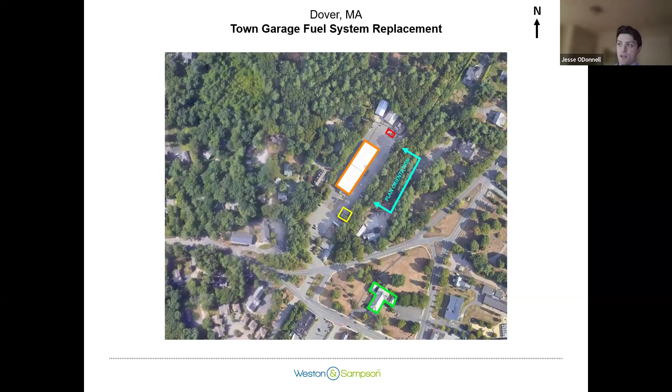So to provide some context of the timeline up to tonight, this has been a long 2+ year project in the making. We've had several milestones along the way, interacting with stakeholders and other boards and community members in town. It started off in June 2023 when Weston and Sampson issued our site feasibility report to the DPW, which evaluated potential upgrades to the salt shed, stormwater systems on the site, as well as the fuel system replacement.

The following August in 2024, we filed our first application with the planning board for this proposed fuel system project. The following September was our first planning board meeting for the project. During that meeting, we received some good feedback from the planning board. Notably, we received feedback to shift the fuel system a bit further away from the cell tower enclosure in the rear portion of the site, which we did implement to the planning board's satisfaction.

The planning board during that meeting also requested that we gather some feedback from the Conservation Commission. The project did not require that because it wasn't in the jurisdiction of the Conservation Commission, but we did seek to get on their agenda to gather their input, which we did. We presented this in front of the Conservation Commission on October 23rd of last year and received good feedback from the commission as well. That feedback mostly pertained to erosion controls and spill prevention measures, and we incorporated that feedback into the design, which we'll mention during our presentation tonight.

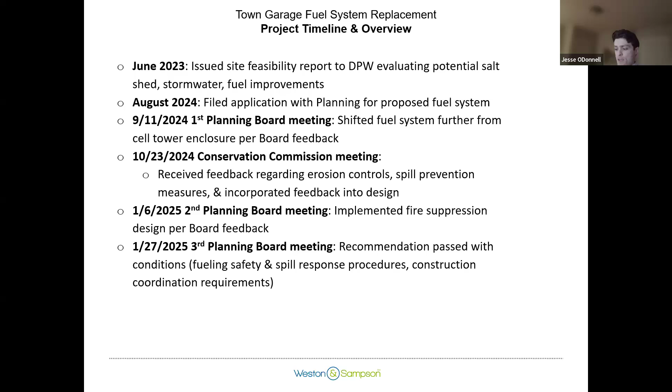There were a number of conditions, primarily pertaining to fueling safety and spill response procedures, as well as some construction coordination requirements. So that brings us to tonight, presenting in front of the Board of Selectmen.

I'd like to discuss more information on the existing fuel system. You'll see a photograph of the existing fuel system at the top with the Dunkin' Donuts building in the background, and a plan view just below showing the vantage point at which we're looking at this photograph.

The existing location of the fuel tanks presents one logistical challenge: the tank location requires vehicles to reverse either in or out when performing a fueling. This is a cramped and busy area of the site where several DPW vehicles are typically parked just off to the left of the photograph. So this is an unideal condition that we were certainly looking to improve upon with our design.

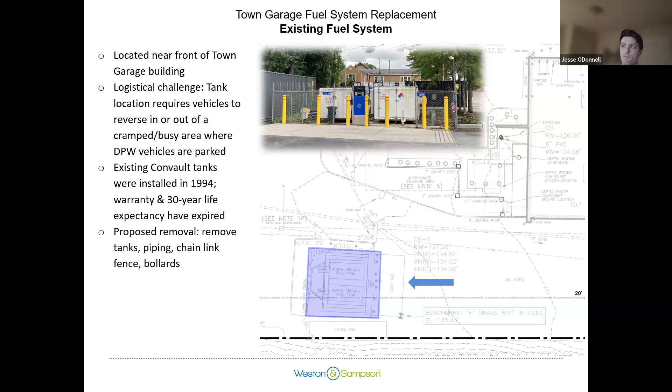The existing Convault tanks, as Kevin mentioned, were installed back in '94, so the warranty and the 30-year life expectancy for those tanks has expired. For public safety, we are looking to replace the tanks as soon as reasonably possible. The proposed removal would also include removal of the associated piping, the chain link fence surrounding them, and the bollards shown in yellow in the photograph.

Here's another aerial image of the site, provided for spatial context. The existing fuel tanks are in yellow, and the proposed tank behind the building is shown in red. You can see the blue dimension lines, and we're showing that the dimension of the fuel tanks to the closest dwelling is pretty equidistant.

We were looking at about 178 feet for both the proposed and the existing fuel tanks to the closest dwelling. The proposed fuel tank in red is about 105 feet away from the DPW garage building, while the existing tanks are a bit closer at 85 feet.

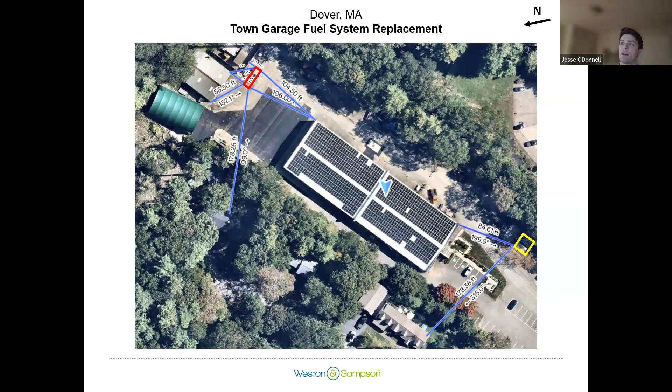As Madam Chair mentioned, there was a siting assessment that Weston and Sampson worked on in coordination with Kevin and the DPW in town. We assessed a number of different options on the site to place the fuel system. We always look to potentially replace the fuel system right in place, but usually this is not a great option, and that proved to be the case for this site.

When doing so, I'd like to mention again those reverse maneuvers that are unideal for vehicles. But also, replacing the fuel system right in place would cause an interruption to on-site fueling operations. For several months during construction, we would need to find a temporary fueling solution for town vehicles, and that can be very expensive and cost prohibitive.

The existing tanks are also partially located within an AT&T easement and the Dover structure setback. So by proposing the tanks to be located elsewhere on site, we would be able to restore some conformity to those items.

We also assessed the area just south of where the existing fuel tanks are currently located, a bit closer to the Dunkin' Donuts building. Doing so would require more funding to accommodate additional geotechnical and environmental drilling efforts to assess soil suitability in that area.

Where we ultimately proposed the tanks in the rear portion of the site, we had already gotten feedback and information on the soil conditions back there, just because of its proximity to the salt shed project and the stormwater improvements we've already done.

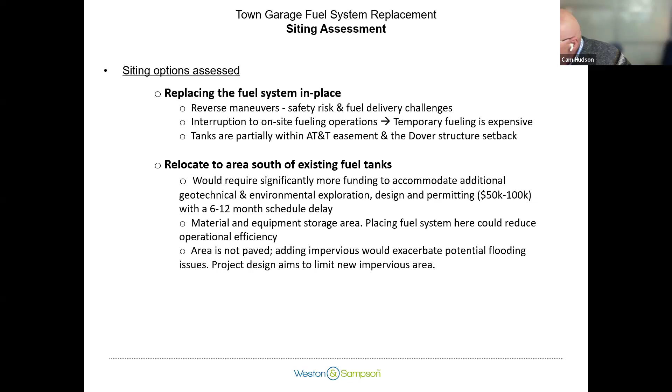The design of the project does aim to limit new impervious area, in accordance with stormwater best practices. So with all that in mind, we looked at the option that we ended up selecting, which is relocating the tanks to the rear portion of the site.

As I mentioned, we did meet with Conservation Commission and the Planning Board to receive their feedback and either have, or will implement, their recommendations to their satisfaction.

We find this is the best option for vehicular circulation and access. It's in an open area in the rear portion of the site that's less congested than the current location of the tanks. The rear location keeps this critical infrastructure away from a public-facing location and away from the parking lot, which can get pretty well utilized during the day in the front.

It complies with zoning and dimensional requirements. The grades in the rear portion of the site are a bit more forgiving, which makes the design easier to manage. Those geotechnical and environmental investigations have already been completed in the rear portion of the site and show that the soil back there can accommodate a facility based on the information those investigations yielded.

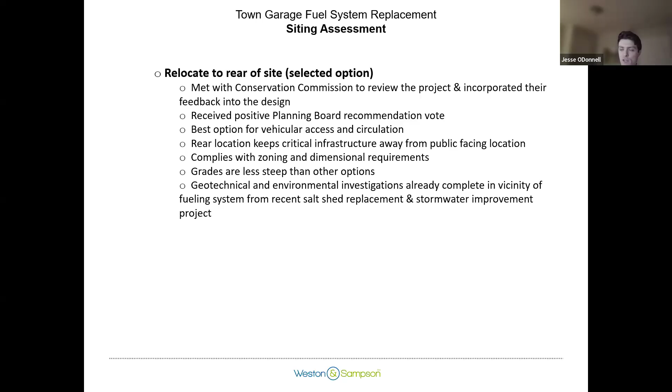So with all that in mind, I'd like to segue to the proposed system in the rear portion of the site. You can see in orange on this plan the location of the proposed 9,990 plus or minus gallon double-walled steel split tank. This is an above-ground tank that contains both gasoline and diesel fuel.

It does have a single-sided fueling configuration. In other words, the vehicles will be pulling up on the left side of the orange rectangle, as you see it on this slide, for fueling.

In red, we're showing the proposed canopy associated with the fuel island. The canopy will have recessed motion sensing lighting. Just beneath the canopy is the concrete fueling pad, which will also have bollards surrounding the pad just to protect the tanks from vehicles.

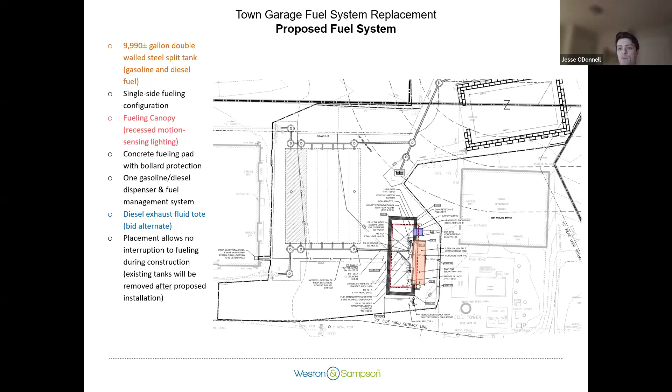In blue is a diesel exhaust fluid tote. This is a feature that we view as a bid alternate to the project. I'd like to reiterate that the placement of the fuel system here allows no interruption to fueling during construction, because the existing tanks would be removed after the proposed installation.

So with that all in mind, I'd like to transition to my colleague Tyler, who will have a few moments to talk about safety features for the proposed infrastructure.

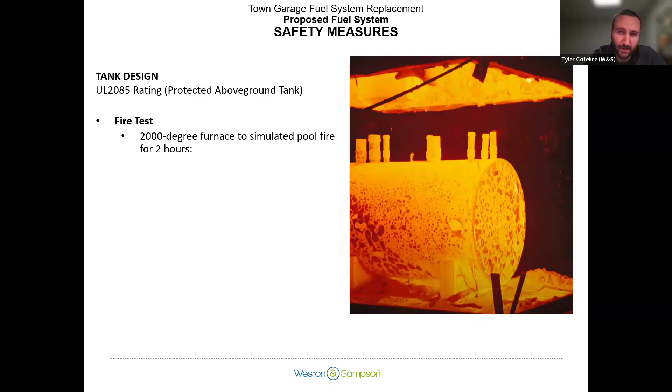Thanks, Jesse. As Jesse mentioned, I wanted to take a couple minutes to talk about safety, which Weston and Sampson does take very seriously, and we know it's been a big concern on this project. There's actually a lot of engineering behind this system that isn't obvious when you just look at a tank on a site plan. So we just want to walk through some of the safety features so everyone is clear as to what we're proposing.

The main piece of the system is a UL 2085 fire guard tank. It's one of the safest tanks you can buy. It's essentially a tank inside of another tank with concrete between the two, and that concrete is super important. It helps protect the inner tank from heat, helps absorb impact, and makes the tank way stronger.

In order for these tanks to achieve a UL 2085 rating, they must go through a pretty intense testing regimen. The first is a 2000-degree furnace test. Essentially this is to simulate someone pouring gasoline all over the island and then lighting it on fire and letting it burn all around the tank. Even under those conditions, the tank is not allowed to burst, explode, or rupture, and the inner tank must stay protected through the whole test.

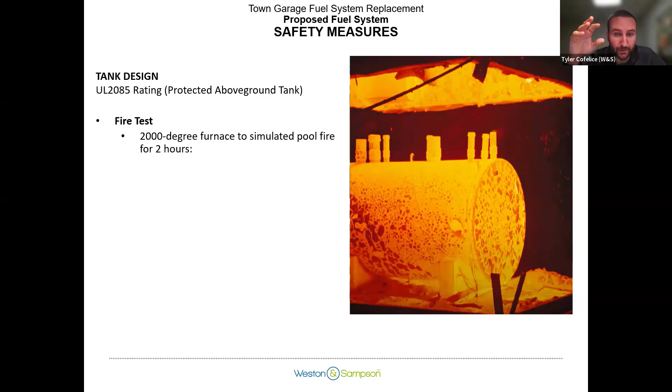I just wanted to highlight that even though the tank can handle a pool fire, as mentioned by Jesse, we are adding fire suppression to help prevent such a scenario from happening in the first place.

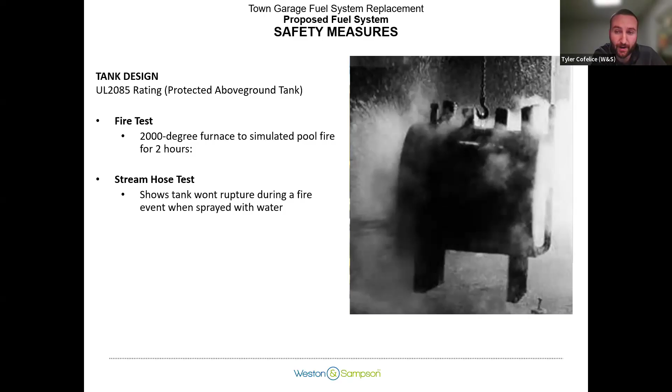Following that is a stream hose test. This simulates making sure the tank doesn't rupture when firefighters are cooling it down after a big fire. So following the fire test, it's hit with a bunch of cold water, and then the tank has to show that it won't crack or rupture, ensuring the fuel inside is safe.

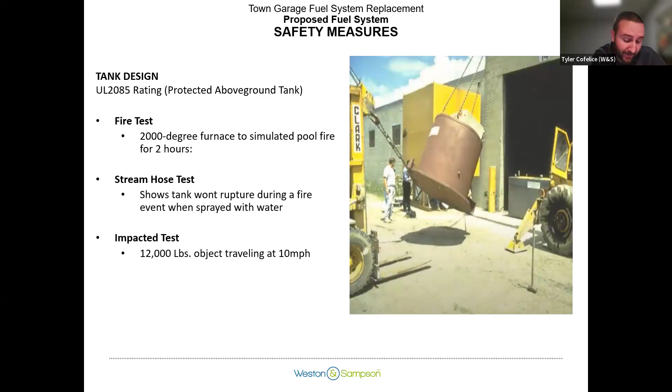In addition to that, it has to also pass an impact test. It's tested with a 12,000-pound object traveling at 10 miles per hour. It's essentially testing it with a vehicle strike, saying that even if a vehicle were to run into this tank, the inner tank has to remain intact and protect the fuel. Again, kind of like a belts and suspenders approach, we are adding bollards so that vehicles don't even have an opportunity to run into it, even though the tank is strong enough to withstand it.

And then lastly, it also has to pass the ballistic test. They shoot this tank 5 times with a 308 rifle at about 100 feet away, and the bullets cannot penetrate the inner tank.

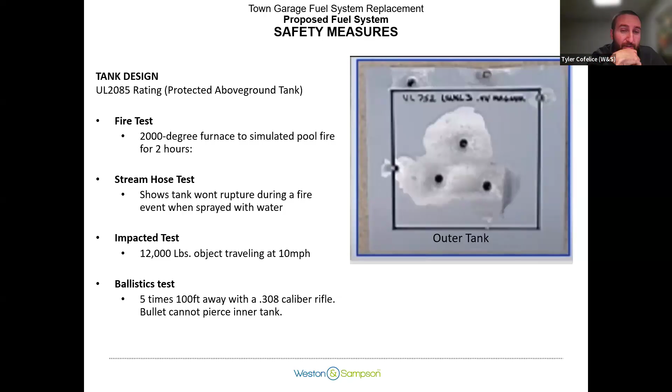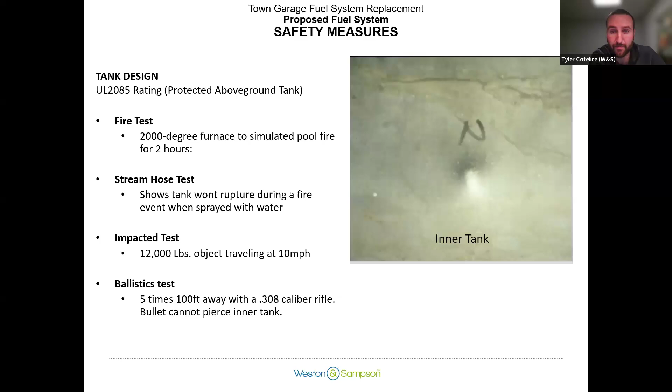So this is a photo showing the outer tank, and then the next picture shows what the inner tank looks like. It's just a small dent. Again, these tanks are not your standard tanks you'd normally think of - this is one of the big safety features of this fuel island.

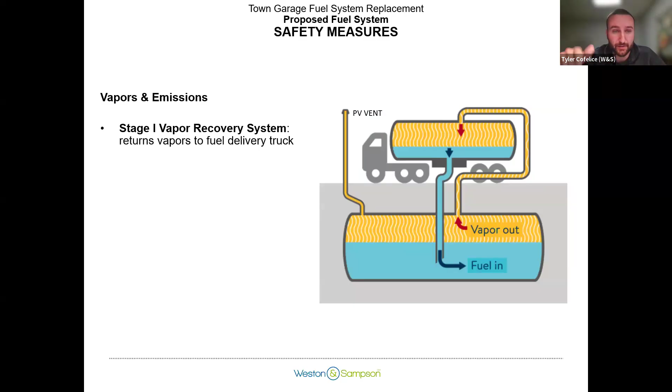In addition to the tank, we also have a bunch of vapor features to help manage vapors on the site. There are actually also regulatory requirements as well. We have a stage 1 vapor recovery system that ensures when tanks are filled, the displaced vapors inside the tank aren't just pushed out to the environment. They're actually pushed back into the delivery truck, as shown in this image.

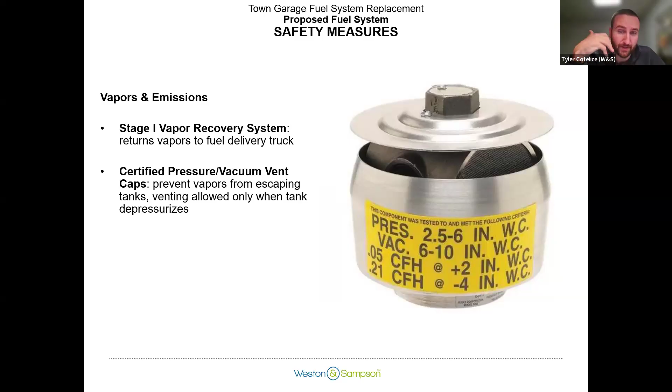We also provide a pressure vacuum vent cap that helps contain the vapors inside the tank, and it only opens to relieve pressure if there's ever a pressure buildup. Modern vehicles are also equipped with vapor recovery to help capture the vapors as you're filling up, which all helps keep the vapors from this fuel island very low. It's similar to what the existing fuel island currently has.

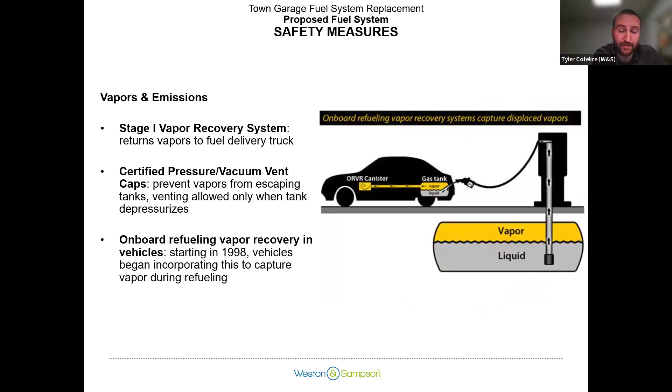There's also tank monitoring and the fuel management system will talk to each other, so that if the levels don't match what has been used, it'll flag that there's a leak not being accounted for. The fuel hoses also have shear valves, so if someone drives away with the fuel hose in the vehicle, it will shear and cut off both ends so no fuel is lost. We have anti-siphon valves, so if there's a leak in the pipe, it doesn't drain the whole tank onto the ground.

We've also talked with the DPW about adding a standard operating procedure of using a catch basin mat that will be placed over the nearest catch basin during tank fuel deliveries, so that if there's an incident, the pad will prevent fuel from going into the drainage system. So it's a lot of belts and suspenders that go into this design to help ensure safety for the neighborhood, the environment, and the DPW itself.

So, Tyler, can I ask you a question about some of these systems? Do they all require electricity, and what happens if the power goes out? No, they don't - a lot of these are passive.

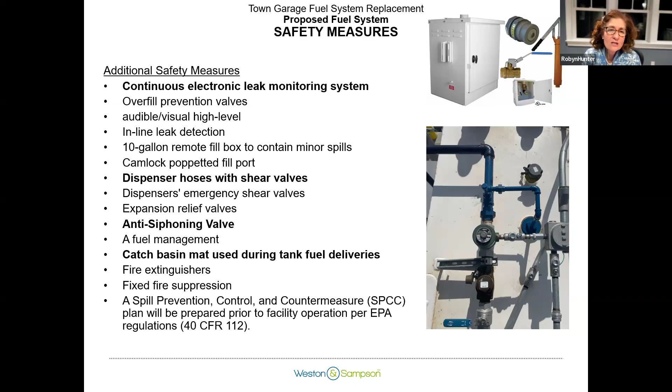Okay, so even if there were a power outage and you wouldn't get notification of a leak, the system itself would ensure that the leak was contained. Yep, and that's also a benefit of having above ground storage tanks. I think it's one of the reasons below ground tanks are not allowed in aquifer protection areas - in that scenario, you can visually detect leaks when tanks are above ground.

Robyn, may I follow up on that? You certainly may. Tyler, is it possible to get a battery for the electronic leak monitoring system? Possibly - I guess, usually these fuel islands are backed up with a generator. Kevin, does the DPW have a generator? Yes. So would this then be connected to that, Kevin? Yes. Okay, perfect, then that addresses all of our concerns. Would that generator automatically come on in the event of a power outage, Kevin? Yes.

I had another question. You mentioned the bollards, Tyler. What sort of strength do they have? You mentioned impact testing of 12,000 pounds on the tank itself, but what protection do the bollards actually offer?

So these are heavy duty bollards, 6-inch diameter filled with concrete. I don't have any numbers off the top of my head, but they're spaced no more than 4 feet apart, so if a vehicle were to impact them, you'd be hitting more than one. They also extend about 4 feet into the ground, so they're heavy duty.

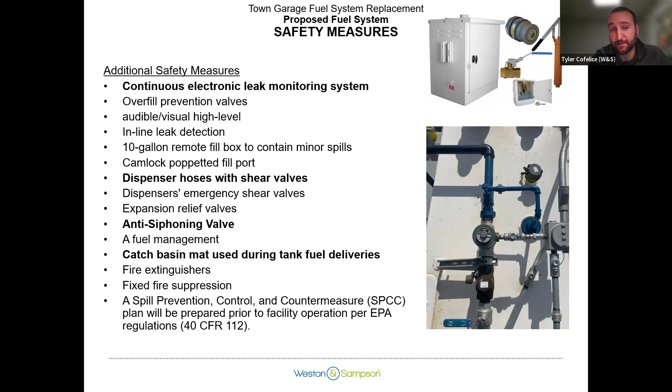And that's the last of my slides. I think it was a perfect time to transition to questions. So certainly this project started many years ago.

I think there are a couple of things that have happened since the start of this project, and Kevin, I don't know if now is the right time for you to give a little bit of an update to everyone. You mentioned to me a few days ago that we're already starting to have some maintenance issues with the current tanks.

Also you had shown me, I think in the conditions on the planning board recommendation, there was a traffic study, which was really not the kind of traffic study that we think of, but really to ensure that large vehicles could be fueled with enough room for that. So it might be a good time if you have those slides to show that as well.

Yeah, would you be able to pull up those maneuver plans, Jesse? Yeah, it's a good time to discuss those.

So for the planning board condition, I think I see a notification that screen sharing has stopped. Let me just reshare if people cannot see my screen. Yeah, and then while Jesse pulls that up...

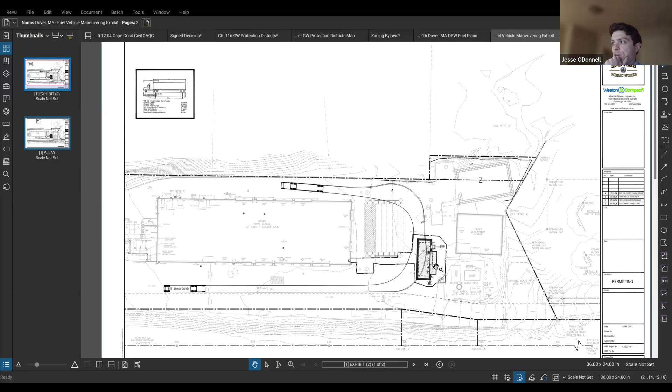Thanks for that recap, Kevin. I can jump over to the traffic turning simulations that we were showing for this plan, if that was a good time. We will go over the conditions of the planning board's recommendations next, this was condition number 16. But given that we were talking about all the different design features you had in place, this would be a good time to discuss this.

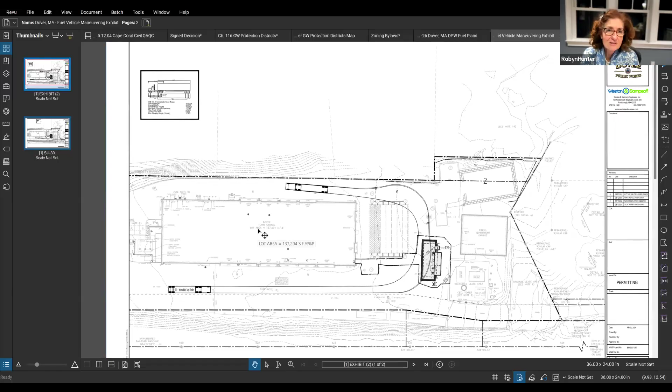Yeah, agreed. So to Robyn's point, this is what we prepared for the vehicle circulation for the proposed project. Just to orient everybody, we have the DPW garage highlighted in blue in this rectangle right now, and you can see the proposed fuel system in a bolder color behind the garage.

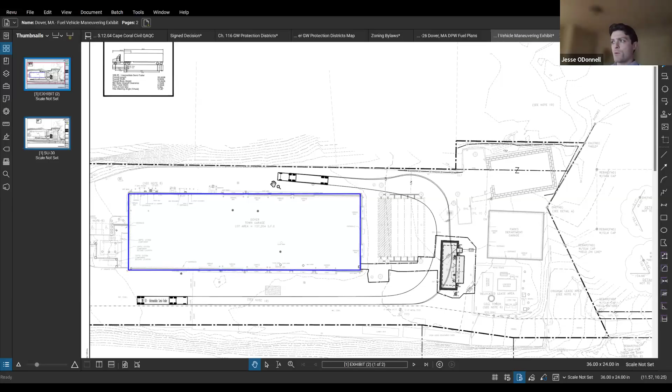What we're showing here is a WB50 semi-trailer, essentially simulating a fuel delivery truck or a large fire truck, the most conservative in terms of design, the largest vehicles that would be running through the site. It's an 18-wheeler, correct? Yeah, this is super conservative, a very large truck.

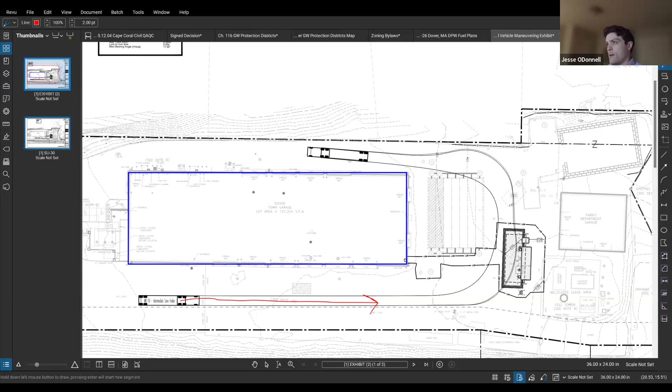We're showing it navigating throughout the site in this counterclockwise formation here. It could very well navigate the other way through the site too. It shows the turning radius it would take and the amount of space required to make these maneuvers. You can see it does take up a lot of space, but it's very adequately accommodated by the development, even with the proposed fuel system shown here.

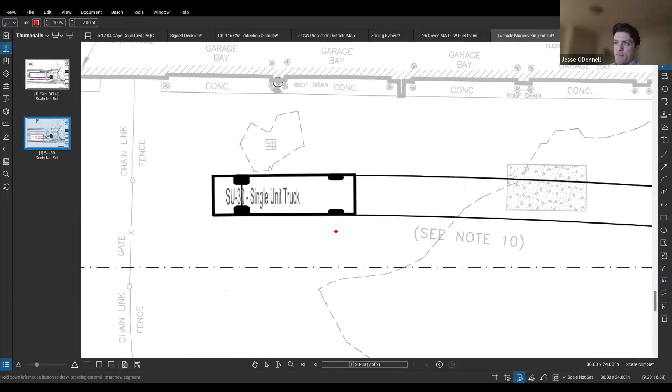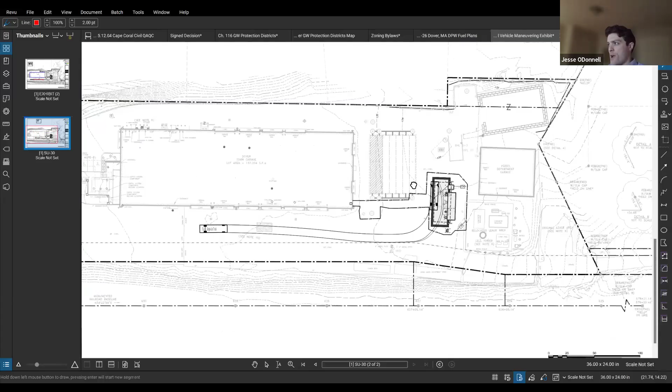We also took a look at the typical DPW vehicle represented by a box truck, an SU-30, which is also a pretty conservative representation of DPW vehicles. We showed that entering and fueling up at the fueling pad as well, and again those could navigate clockwise or counterclockwise throughout the site. That was the extent of the traffic analysis we did, pursuant to that planning board condition.

May I quickly ask a question of Kevin? What is the size of the truck that delivers the fuel today?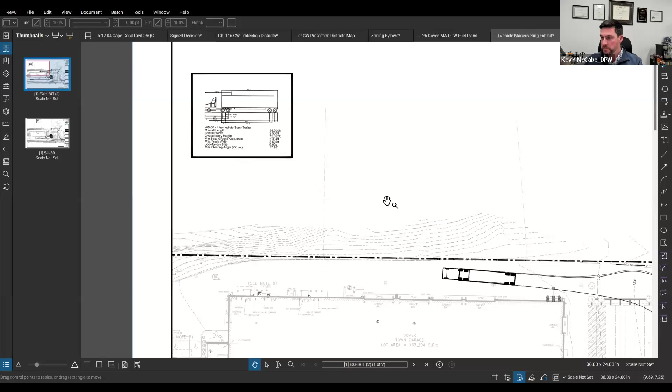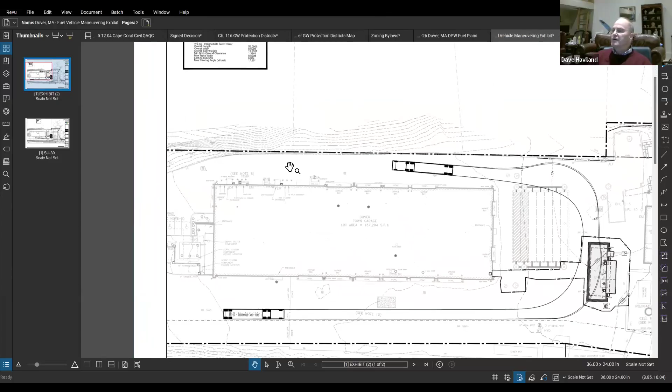It's currently a 10-wheeler, not an 18-wheeler like you'd see going to a much larger facility. I think that's due to the fuel ports being in the back of the existing tank. If you've been down to our facility lately, there's a storage container with a small alleyway in between. The 10-wheeler backs in there, attaches to the fuel ports, and fills up. So while you're being ultra conservative, that second example will happen because that's the fuel delivery truck. Got it, thank you.

Kevin, I have a question on the protocol for traffic entering and exiting the site. I heard Jesse saying the entrance and exit could be from either way. Is that not going to cause problems with traffic control if some people start driving in and somebody else is trying to drive out? How do you plan to manage that?

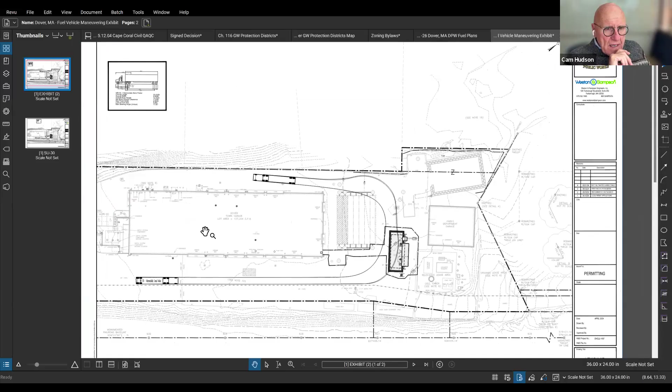Current operations on the south side of the DPW are super adequate for two vehicles, and that's most of the passage of our vehicles. It's frequent but infrequent, with the ebb and flow of whether guys are already out or we need to come back for materials or equipment. We order the fuel so we know it'll be there the next day when we call. So to date, no issues.

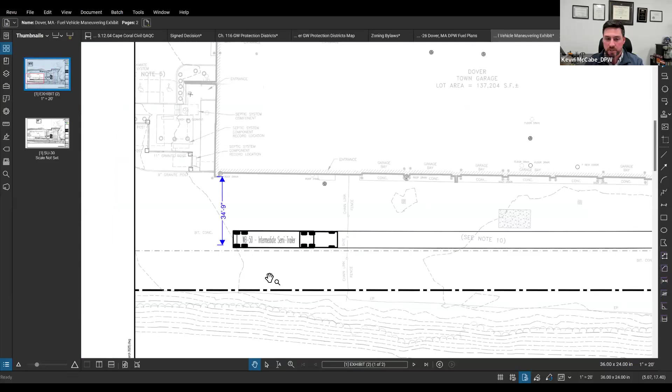No, I'm thinking less of the fueling vehicles, but of the day-to-day fueling of vehicles. It seems to me there's an opportunity for a little bit of chaos there if there isn't a clear priority entrance and exit path.

No, I don't agree with that. Where it's set up now is a choke point, and we've managed it. The only kind of hectic time is when the larger apparatus that fire operates comes in, because the fuel ports are in the back of the vehicle. Especially the ladder truck, they have to back in at an angle, so that's really the only time we have a proceed-with-caution situation.

I think what Cam is trying to say nicely is that perhaps we should consider, as part of this, whether it makes sense to have the traffic flow in one direction—so you come in one side and go out the other. Maybe that's something you can take a look at with the police chief or the fire chief, and see if that will make sense.

I think because inherently a lot of fleets have fuel ports on different sides of the vehicle, some vehicles may have to come the other way. That's why I really wasn't making that proposal, Robyn, because I felt there might be cases where trucks actually had to come in the other way to access it.

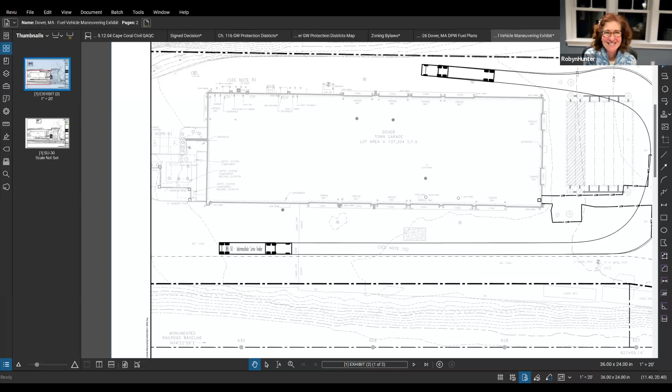Okay. Well, we're sure you know how to, and your team knows how to navigate all of this. Absolutely, absolutely.

Are there any more questions for Weston and Sampson, or Kevin?

I had a general question. I'm not sure whether this is the right time to raise it, but you did mention in your presentation, Jesse, the alternatives considered. I know there has been some suggestion in the town that we might be able to get commercial suppliers to step in rather than have us build this enormous infrastructure. I'm just wondering how you address those sorts of broader issues.

Are you referring to the temporary tanks that we would need? No, I'm thinking about the whole plan of whether this is the right location. That's what we're supposed to be discussing this evening, and I know there's a deal of citizens' concern about the location. I think you have certainly addressed the safety issues in a remarkable fashion, so I'm not detracting from that. I just wonder if there are real alternatives and whether they've been explored.

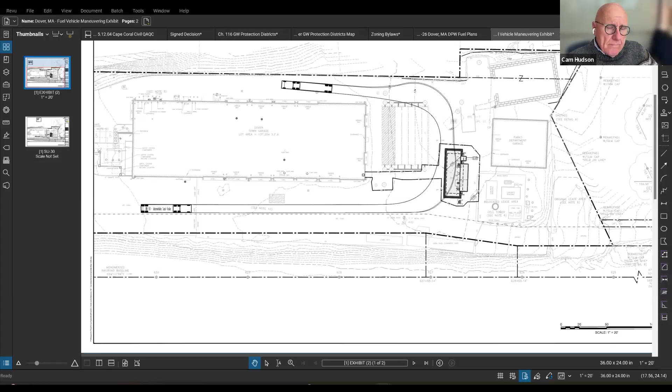So I can speak more to that. I think you may be referring to the fuel card program that the state of Massachusetts has through the WEX card system. I recently went through a study for a similar municipality where we looked at installing a new fuel system versus just transitioning to retail. Over the life of a fuel island, it's actually significantly cheaper to own your own fuel—you get it at a much more discounted price. Whereas if you're buying retail, you're paying much more per gallon. So over the lifetime of a fuel island, you'll be saving more than you spend. It's advantageous for a municipality that uses so much fuel to be able to buy in bulk.

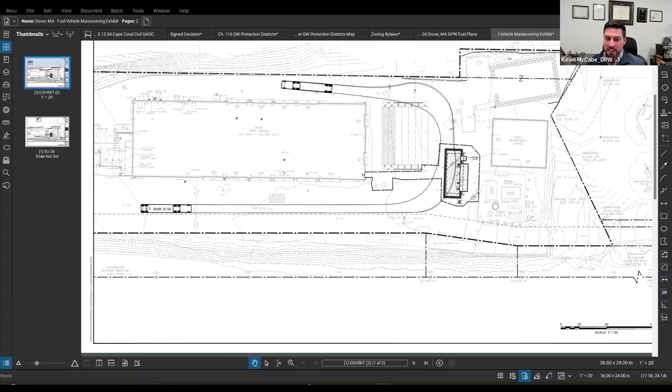Kevin, could you also speak to your efforts to reach out to neighboring communities? Yeah, Cam's wearing his warrant hat there because these are questions that were raised last year and this year too. I've met with the liaison, and the reason the WEX program wouldn't work for us is basically there's no 24/7 gas in the nearby vicinity. Not to mention, once it's dyed, you can't get the tax reduction off it, so we'd pay retail like everybody else, and we'd pay a significant charge under that because ours is undyed fuel.

To follow up on that, I've since confirmed with other DPWs that they would not sell us fuel and would only help us out if our tanks went down, we ran out of fuel, we were in an emergency, or there was a potential outage for a month or so. Sherborn, Westwood, Needham, and Medfield have denied that request to be a permanent supplier for us.

We also looked at the feasibility of potentially the mobile station in Dover. The tanks would be underground, and we're not sure it's even large enough to have the fire trucks come in there and refuel. But again, these are all things that I think have been vetted and will continue to be vetted during the open hearing process. So this evening, what we're asked to vote on is the recommendation of the site for the fuel island at the town garage.

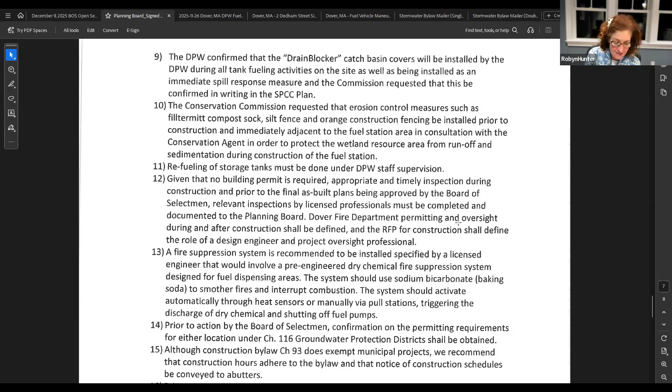A fire suppression system was recommended, and as Weston and Sampson mentioned, it has been included, so that condition has already been met.

Another condition that has been met was that, prior to action by the board, confirmation that the permitting requirement for either location under Chapter 116 groundwater protection district shall be obtained, and that was obtained during town meeting.

And although the construction bylaw, Chapter 93, does exempt municipal projects from the construction hours, the town is committed to adhering to the construction hours bylaw. And lastly, the traffic study, as we showed, has been completed.

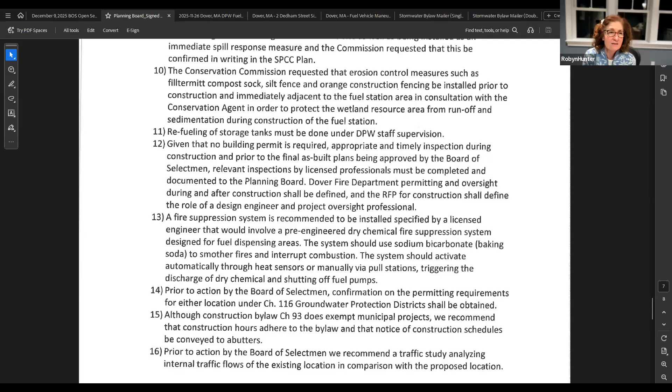So the planning board did recommend the site. However, there are 15 or 16 conditions that need to be met, some that have already been met, and some that will be met as the project advances. So are there any questions regarding the planning board's recommendation and conditions?

And Carol, if you'd like to add something, please feel free to do so. Thank you, Robyn. Thank you for going through all that.

I would just add that looking back at 40, 50, 60 site plan reviews that the planning board has done over the last 6 to 8 years, this was the second most comprehensive site plan review that we did, with the second most conditions that were put into it.

And I did have the opportunity over the last couple of days to rewatch the over 4.5 hours of meetings that the planning board had during those 3 meetings in September and then January of 2025. With a lot of input from the fire department, the chiefs, and a lot of discussions with DPW staff, we feel that the conditions are comprehensive and really address the issues that have been raised by everybody during this process.

Thank you. And I think many of the conditions were concerns of residents, and those were also taken into account. Those over 4 hours of meetings were really informative, and we did listen and made sure that issues were addressed.